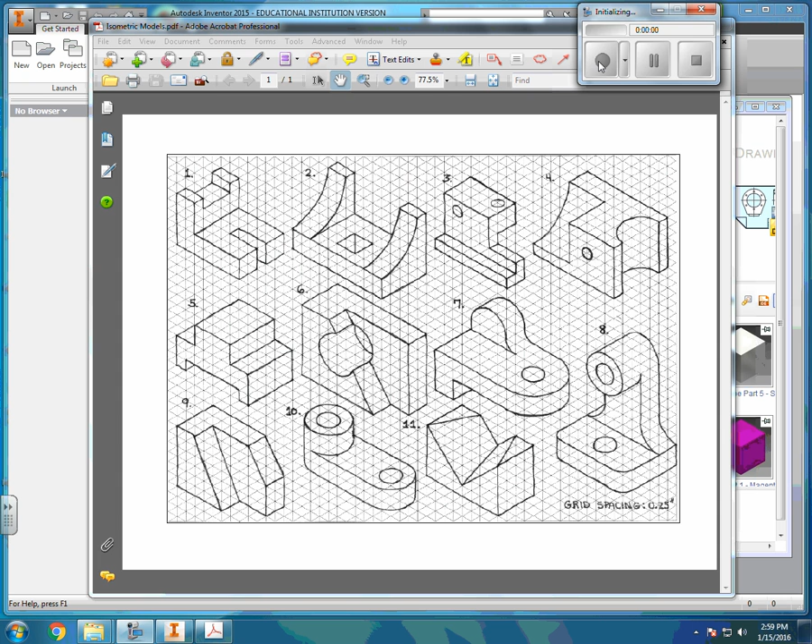Here I'm going to show you the part that will be demonstrated in this tutorial. Number 11 looks like it starts with a block and then you see these two triangles. It looks like we might have to use the loft cut feature to cut this triangle part. If you looked at this normally you'd think you could do an extrude cut for the triangle, but they are in two different sizes, so I'll show you how to do that properly on Inventor.

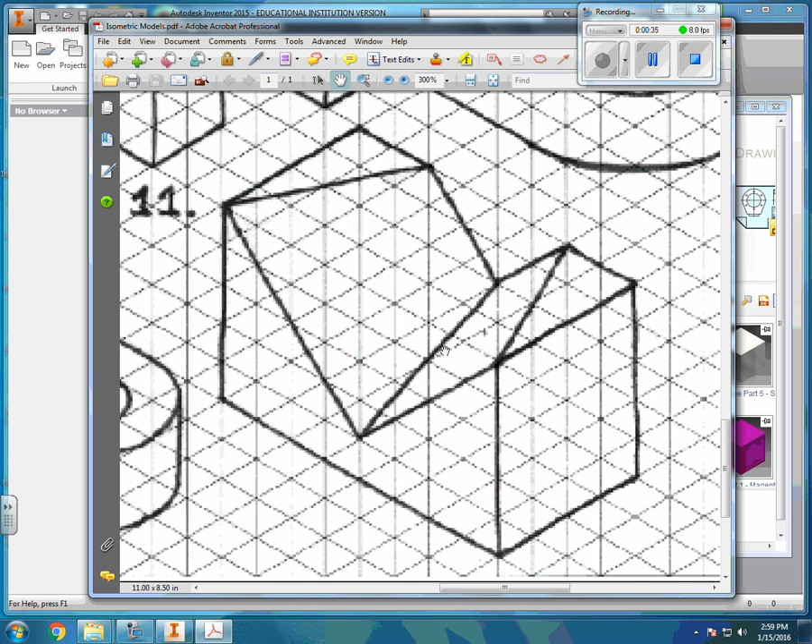Go ahead and open up Inventor. I'm going to minimize this so you guys can see what the part looked like that we'll be modeling for this tutorial.

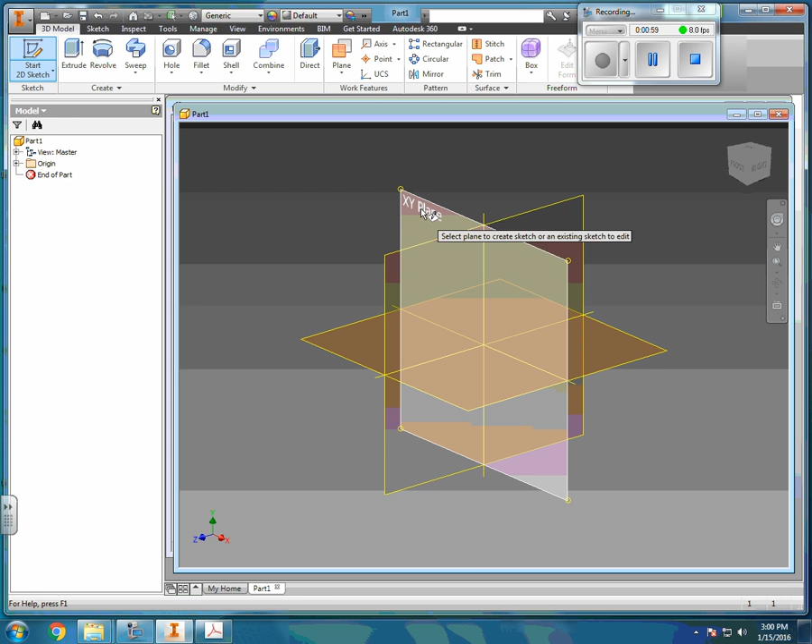Now that Inventor is opened, I'm going to go ahead and create a 2D sketch. It's going to bring up the work planes here. I'm going to click on the XY plane and create a 2-point rectangle, lock it at the 0,0 coordinate, zoom out here and create the triangle.

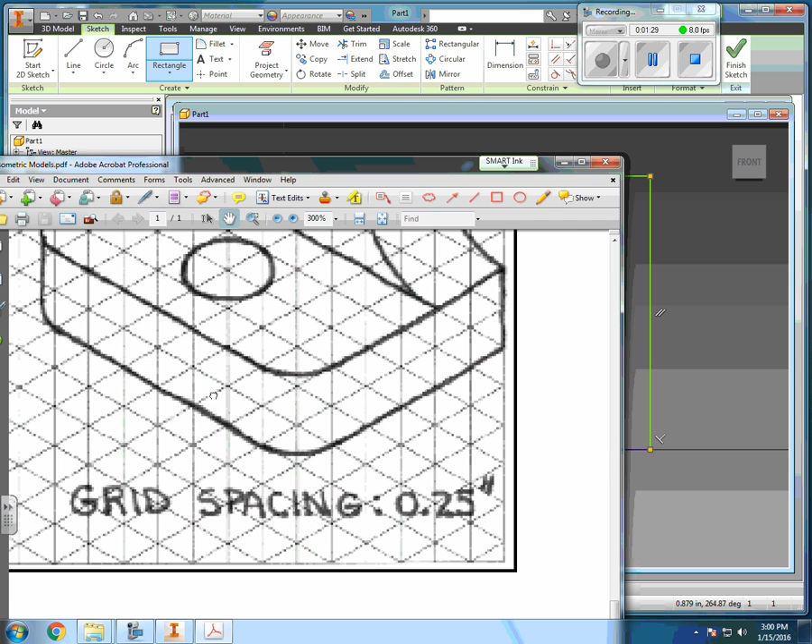Now I don't have to be exact because I always have that lovely feature called dimension where I can set it. If I look at my part and count how many blocks there are, remember the spacing is 0.25 for every grid, every space, every block. So it looks like 2, 4, 6, 8. Looks like the length of this front view is 4 and the height is 2.25. So I'm going to go ahead and dimension this.

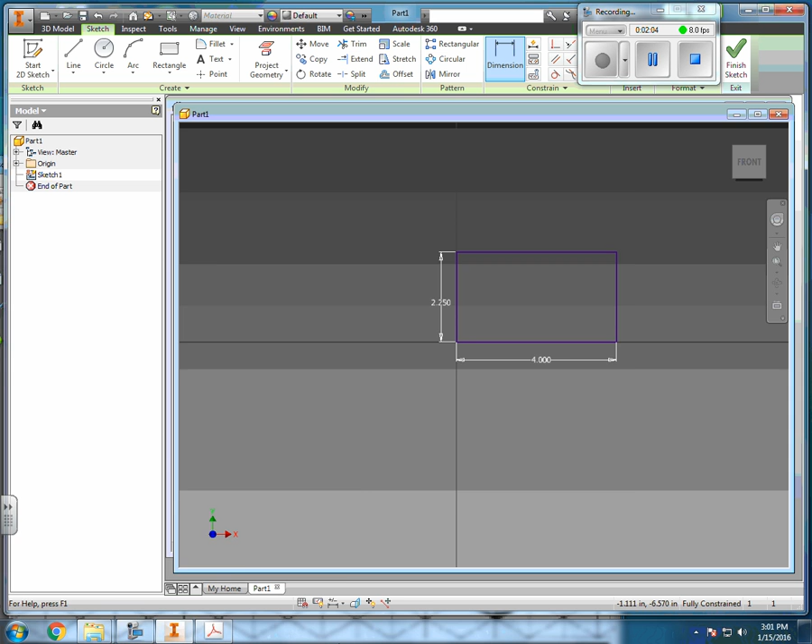So I'm going to dimension this length. It was close, but it's actually 4. Let's see how close I was here. Closer. And set that to 2.25, and now I have a block set to the front part of this shape. Now ignore the triangle for now because we're just going to create this box and extrude it, or this rectangle. I'm going to look at the depth of this rectangle. Looks like it goes back 8 spaces, which will be a depth of 2.

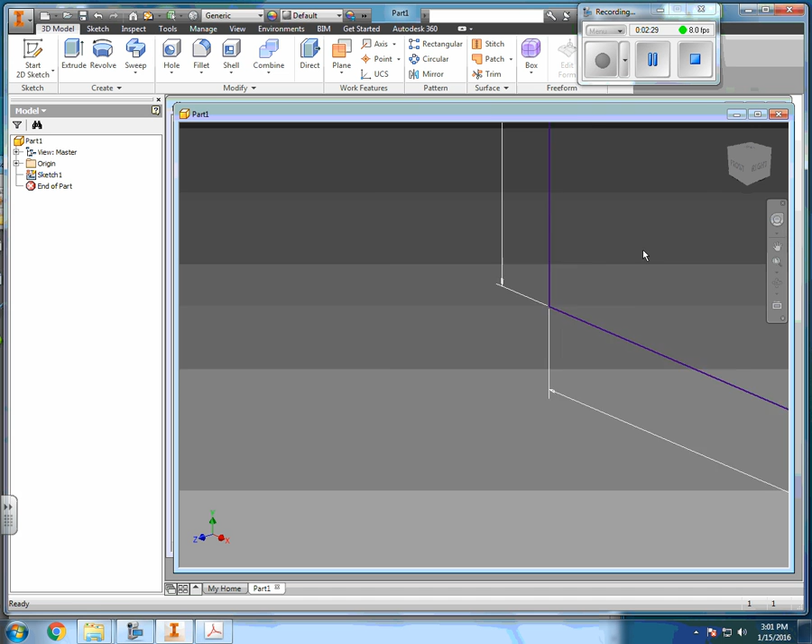So with that, I'm going to finish the sketch. And when I finish the sketch, I'm going to go ahead and extrude. I like to put it in the back direction, but you can choose to bring it forward, back, or equal distance. Go ahead and bring it back, and again we looked at that and said it was at a depth of 2. I'm going to go ahead and hit OK. So there is my block.

But now what you notice from the drawing is that there are these 2 triangles, right? So there's one triangle here and one in the back. Let's go ahead and draw this first triangle.

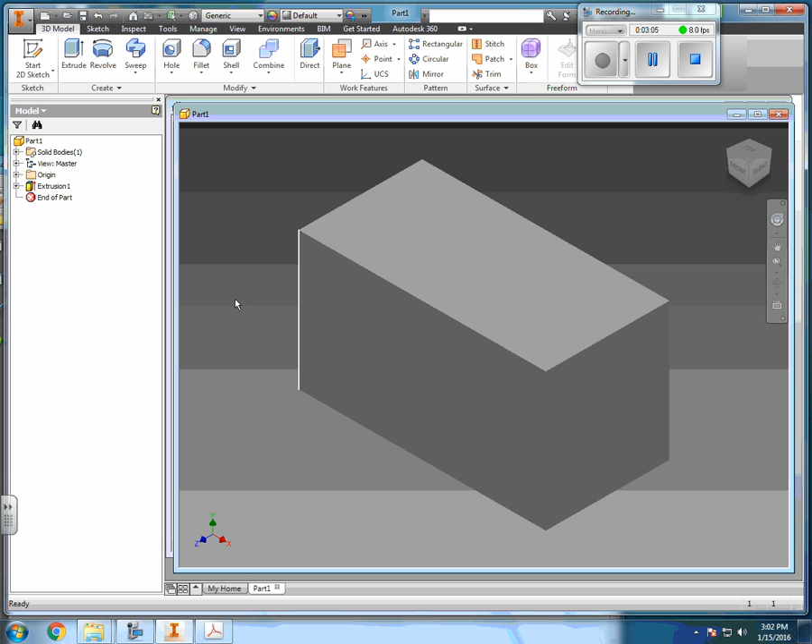I'm going to go back here and create a 2D sketch, and I'm going to put it on my front view. I'm going to use my line feature to draw my triangle and try to pick up the midway point of this, because I see from the isometric model drawing that the triangle actually meets that point.

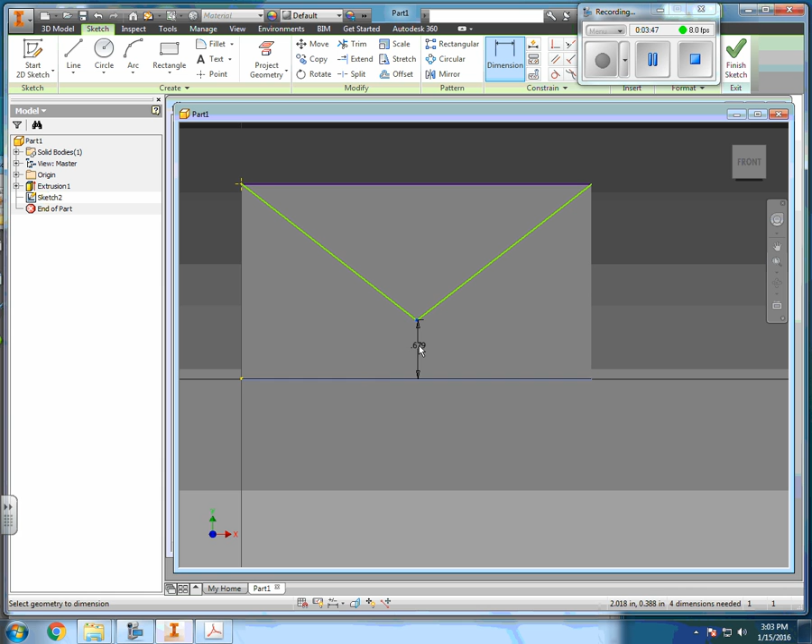Once I do this, I'm going to go to dimension and set my constraints for this triangle. What I notice here is the distance of the point of the triangle to the edge, which is 0.5. So I'm going to dimension the edge to the point, and it looks like it was at 0.25, one block. Now you notice how yours might not do this, but mine did - it actually shifted, because I have to constrain this to the other edge of this block.

As I said earlier, if my total length is 4, it looks like it's constrained at the center, so I can do a trick here and go 4 divided by 2, or you can just type in 2. Just want to show you that. And now that is constrained. This line is green, so I'm going to see if maybe I can go ahead and constrain that too.

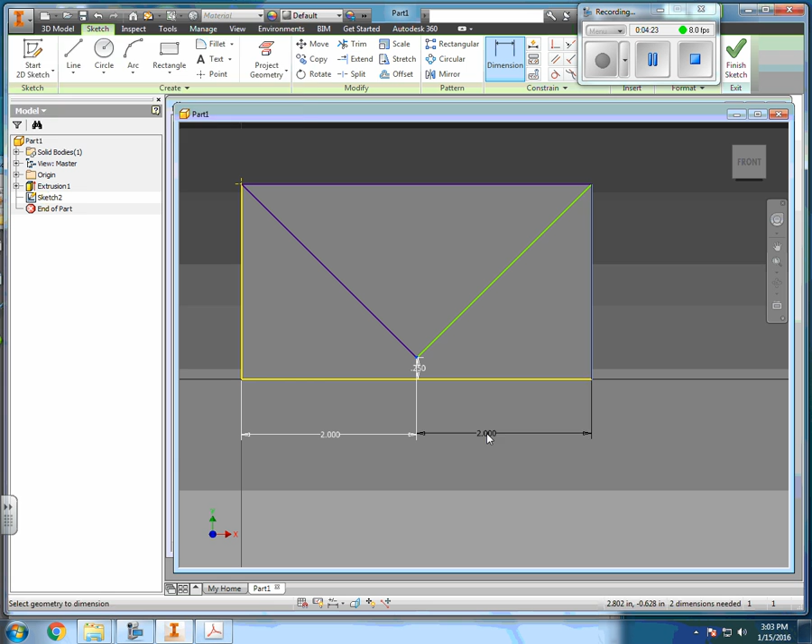Once I've completed this sketch, I'm going to finish sketch, and you can see my front triangle is here. This time usually what we do is go ahead and hit extrude, but if we were to do that it would extrude straight back, and that is not what we want.

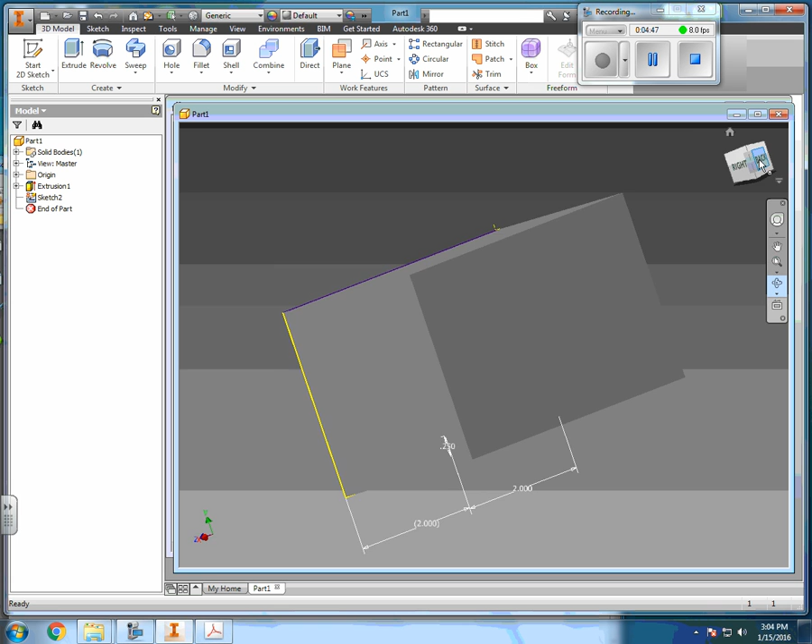So what we need to do is actually create another sketch in the back of our block, and that will accommodate for this small triangle back here that we need to loft cut to. I'm going to go ahead and create a sketch in the back, and that should take you to sketch 3 if you followed the order that I did it here.

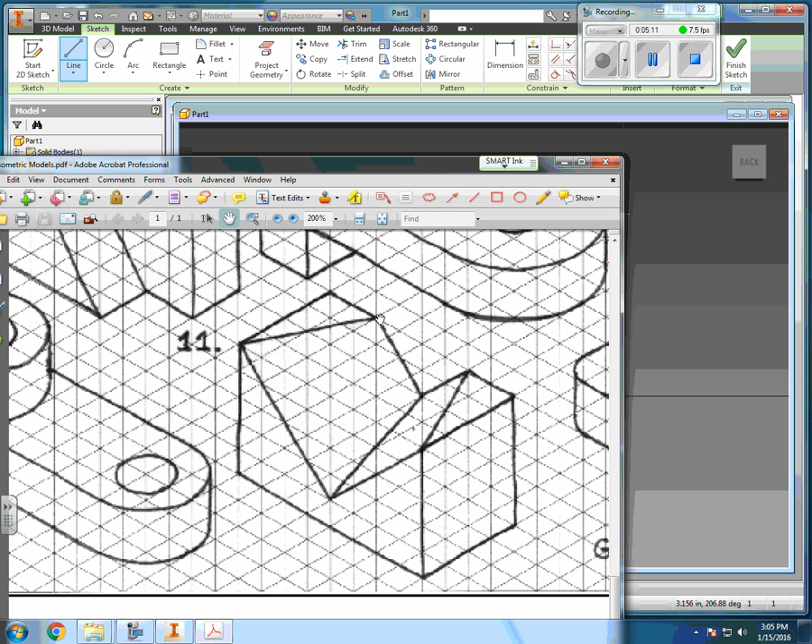I'm going to create a triangle, and this time you can tell from the drawing that the triangle doesn't meet at the very edge. It actually comes out 0.5 from both ends and then dips down. So with that said, I'm going to come here, draw the line, and just go ahead and drop it on this line. I'll try my best to lock that in the center, but we can always adjust that later.

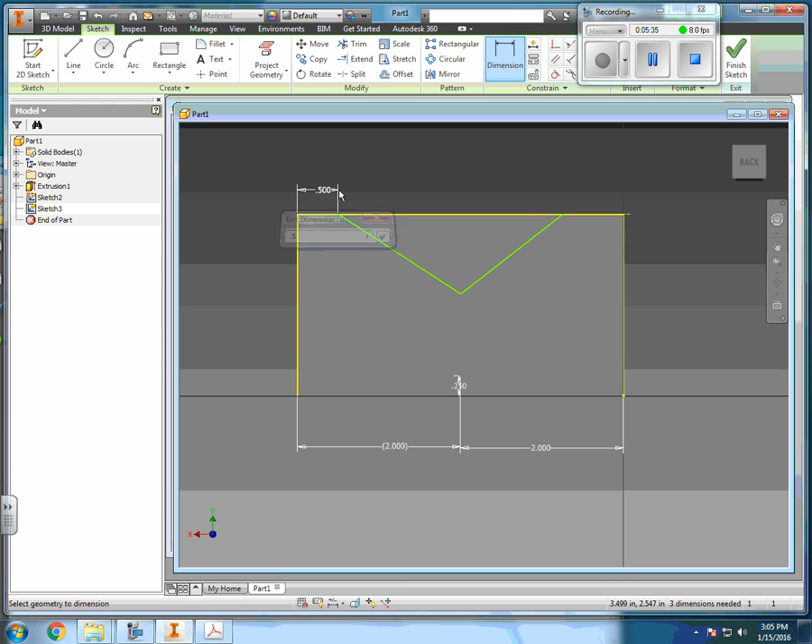I'm going to hit dimension. Remember, if you look at it, it was 0.5. Oh yep, it was 0.5. I'm going to go ahead and do this at 0.5. And then I'm going to dimension the bottom edge - if I look, it looks like it's at 1.25. And my final dimension will be here, so close - it's 2.0207324, but I just want that at 2.

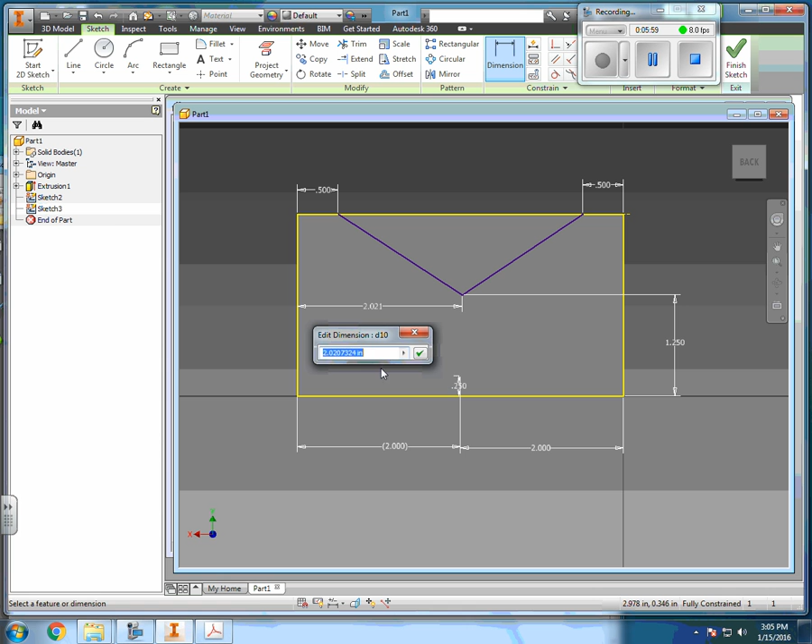And now that is constrained. Once you have your triangle established, go ahead and finish your sketch, and go back to my cube here. Okay, so now I should have 2 sketches on my user browser.

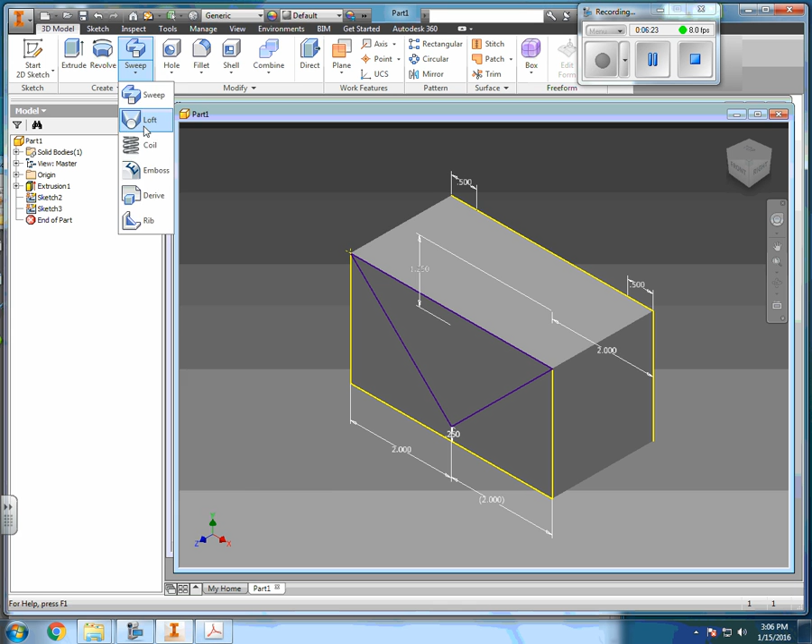What I'm going to do now is go to the sweep command - actually, I need the loft feature. So again, you need to find that under the sweep command. Under loft, right now it's default at join, but I really want it to loft cut. It says sections to add.

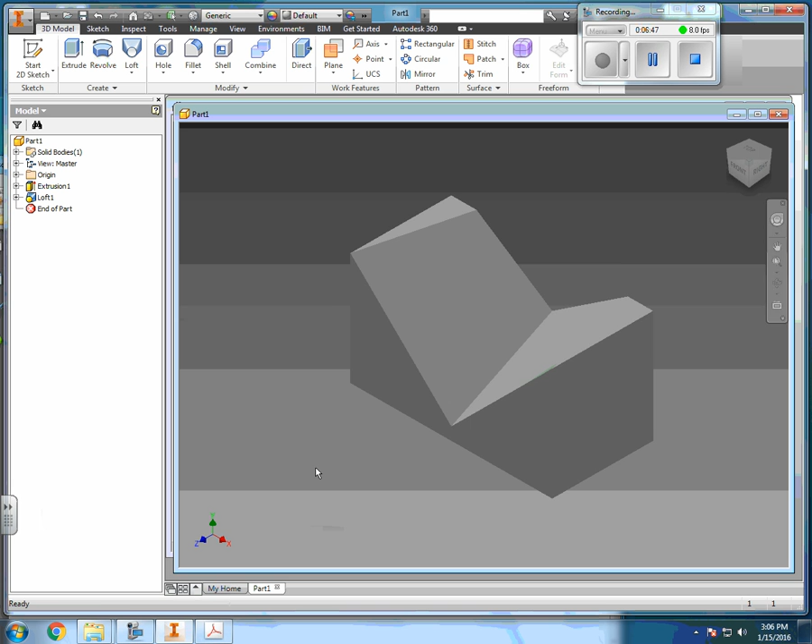I'm going to go ahead and select a sketch. I'm going to select sketch 2, and select that triangle part in sketch 2. Click to add. I'm going to click on sketch 3, do the back, hit OK, and then that should give you the loft cut for isometric model number 11.

And go ahead and put that in the isometric view, and that should look right if you did it right. We'll find out when you guys dimension it, but this is what you just modeled on Inventor.